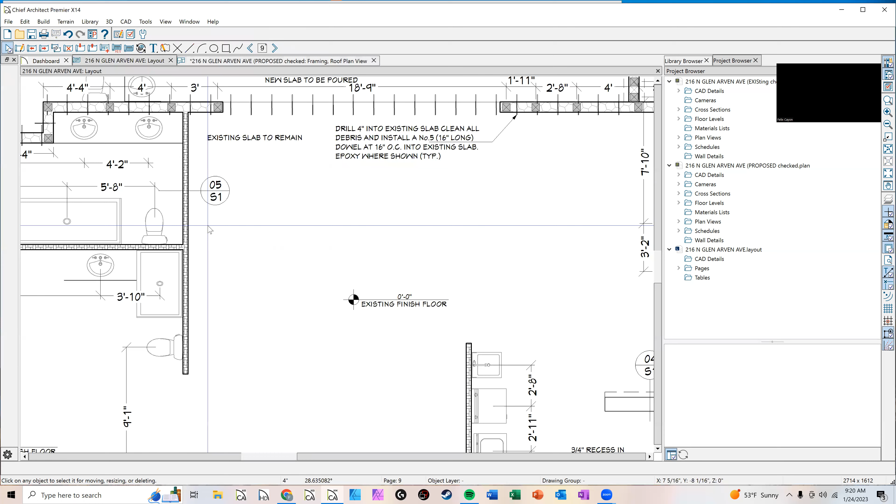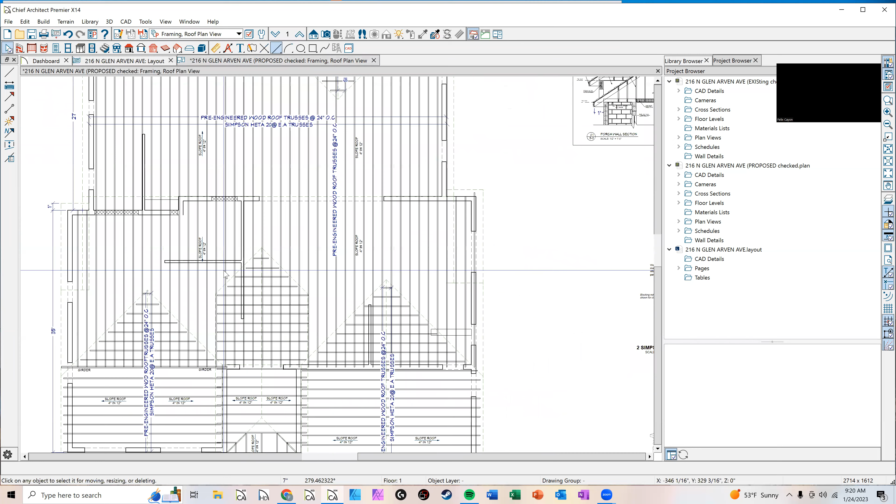If we look at your roof framing plan, these trusses are running this way, right? All of them are running this way. There's no way that this wall would be load-bearing. This one could be load-bearing, but there's no need to make it a load-bearing wall. So I wouldn't even make this a load-bearing wall.

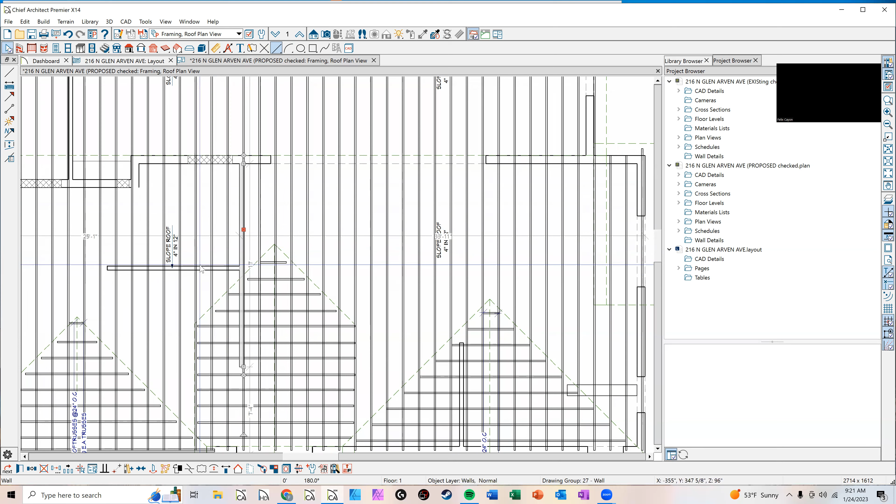But the only one that could actually hold the weight of the trusses would be this one. But we're not going to do that either. So this is not a load-bearing wall. This is not a load-bearing wall. This is not a load-bearing wall. The only load-bearing walls are here and here.

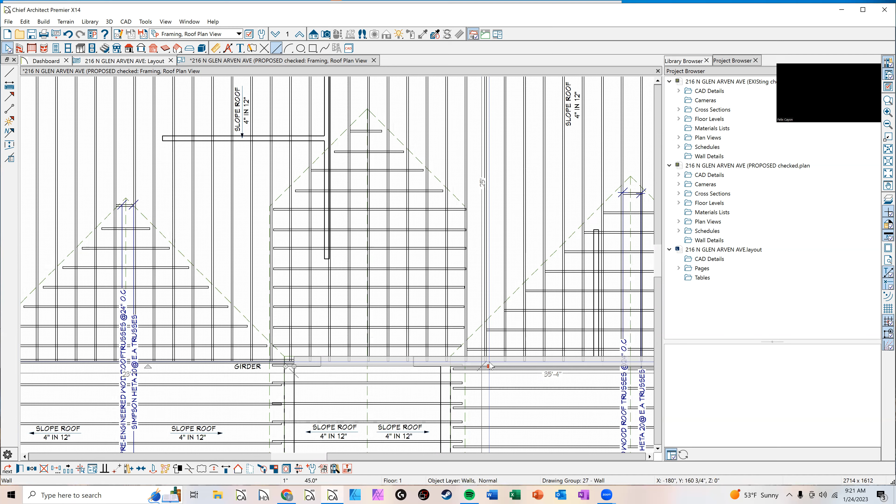And we're bearing on this girder. This is bearing load. And this is bearing load. This is bearing load. This is bearing load. But as far as these big trusses, they're only holding weight on this wall. You see where it ends? What's holding it up. And you see where it ends on this side? That's what's holding it up, this wall.

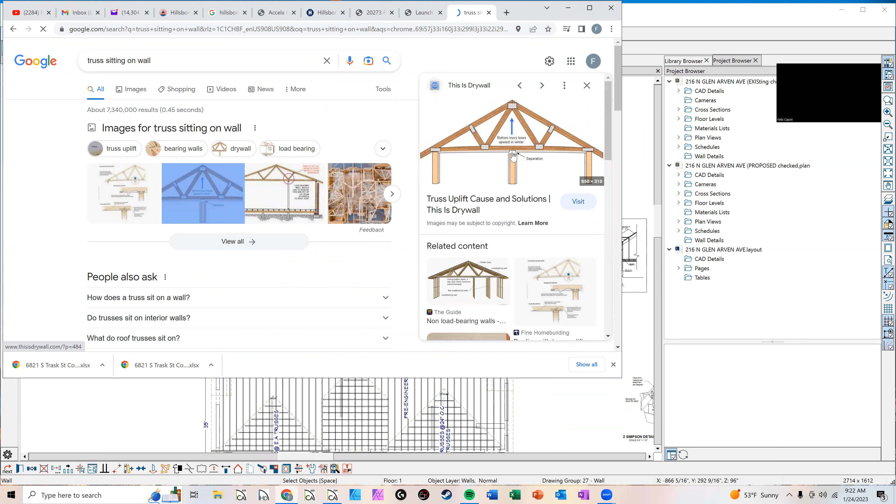There are only two load-bearing walls. Those are where the trusses sit. Let me see if I can show you an example of sitting on a wall. Load-bearing means the truss is sitting on the wall like that. But in our case, it's not. You see?

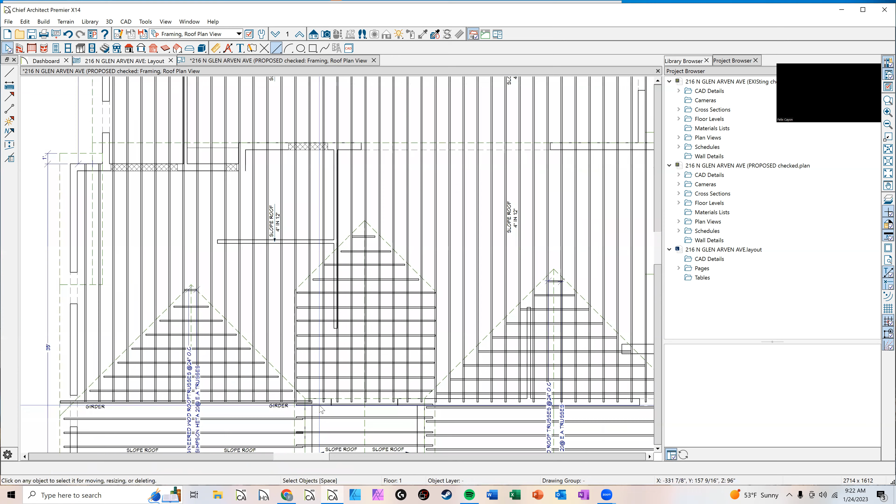And we don't need to put weight on this because we can hold it up with this wall here, which is already load-bearing because it was the load-bearing wall from the pre-existing house. We can use this if we wanted to, and use this, and use this, and just leave the rest of it alone. So no need for a load-bearing wall on this.

So what we're going to end up doing is just taking this out, delete. This, we need to go in here and get rid of this, delete. I think that's the only place you got them. And we can actually keep this wall because that's for the toilet, and this wall because that's for the toilet. That wall stays and that wall stays. Everything else looks clean. It was just that.

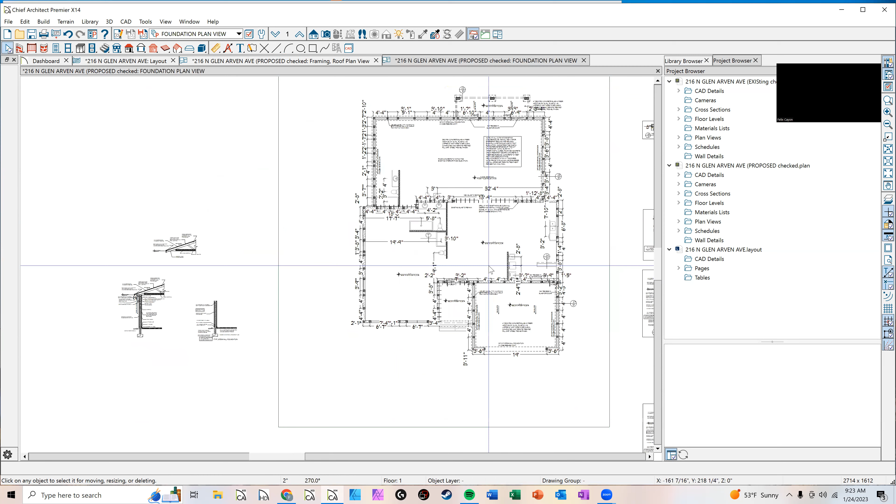And if you want to look at the detail that I had to make for the outside, I ended up putting these in because we are actually building on top of the existing wall. So I made this detail here that shows the existing wall, exterior finished stucco coat, existing wall to remain, new CMU wall, which starts here, over the existing bond beam. See, existing bond beam to remain, and then we're going with blocks.

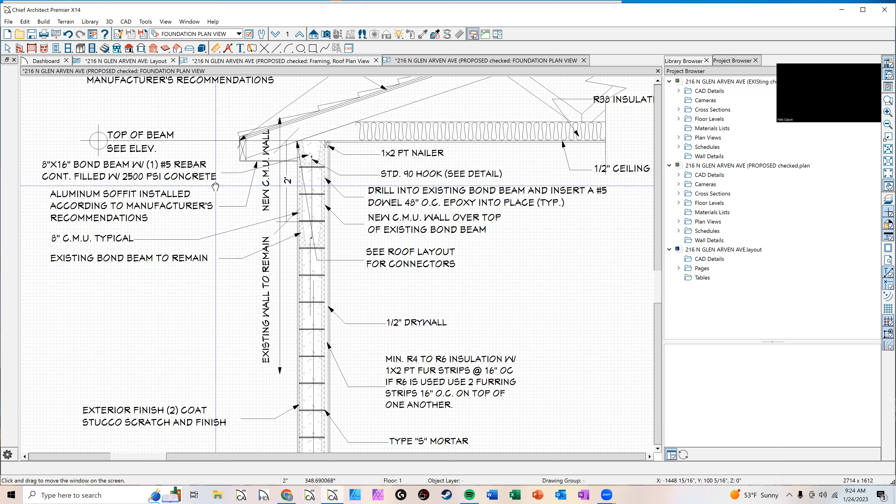How we're going to attach that, see, we put new CMU wall over top of existing bond beam. We're going to drill into the existing bond beam and insert a number 5 dowel 48 inches on center and epoxy into place. 1 by 2 nailer up top so they can nail the plywood, and a new bond beam up top here. And that's how we're going to tie it all together.

But that's the other detail that I made to make this all work. But again, load-bearing walls are only walls that carry the weight of the trusses. We're not going to be carrying any weight here or here, so we don't have to worry about those. All right.